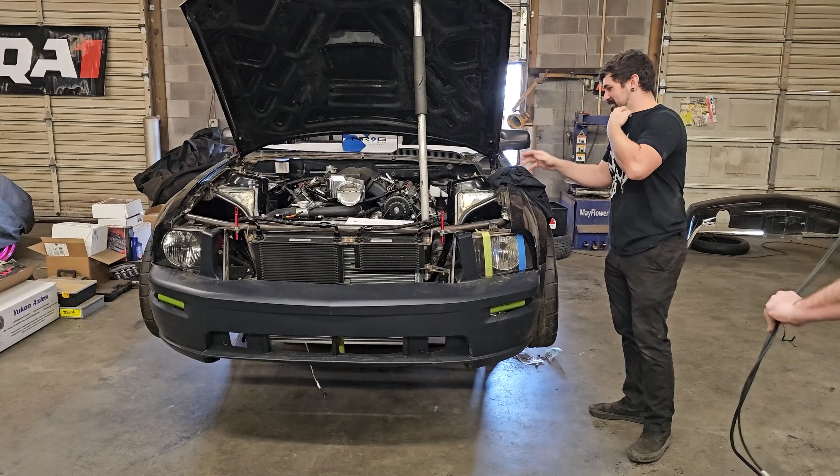Matt, I think this is the first time we'll be showing that you actually have a front end on your car. Look at that. Is that a V6 bumper? Look, I did it, I talked shit, Matt. It's not a V6 bumper. Show off the banners too? Dang, we're almost like real race car guys now.

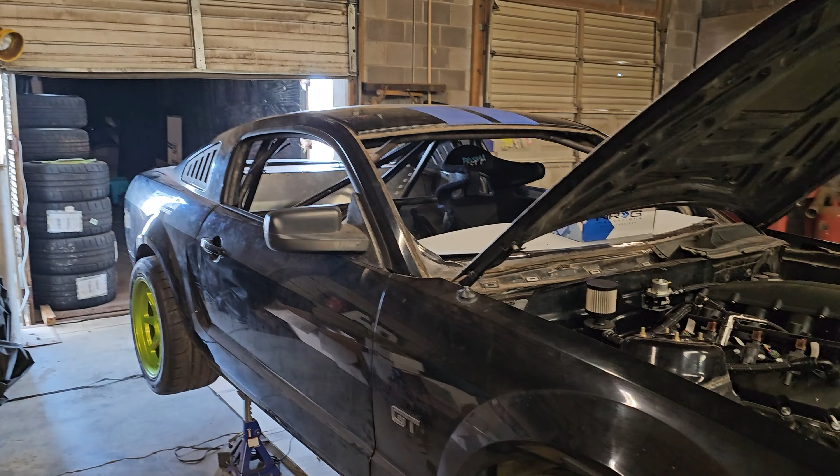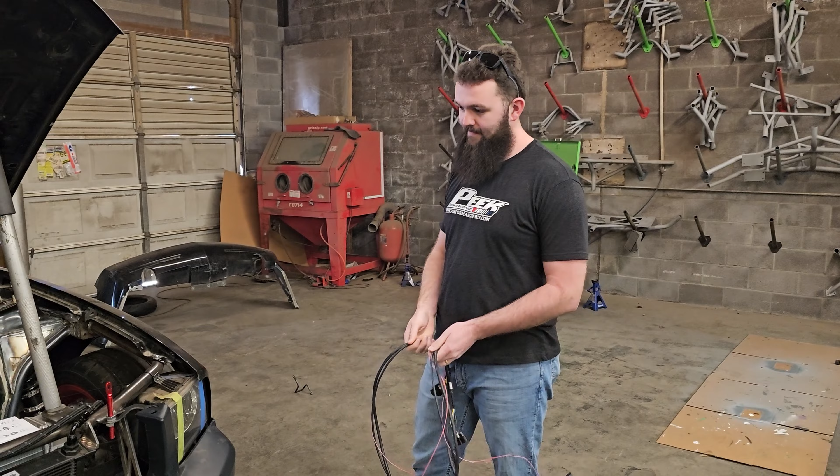For an intro, this is Ty. Ty is with Peek Performance, and he's a Holley dealer and an engine expert, and he's the guy who did all the dyno testing, or Spintron testing, at VTR to test valve trains up to 10,000 plus RPM. He's a nerd about cam profiles, valve springs, engine internals, all that kind of stuff, and he's here to help us with the Terminator wiring for the homologation between an LT throttle body and a Ford pedal.

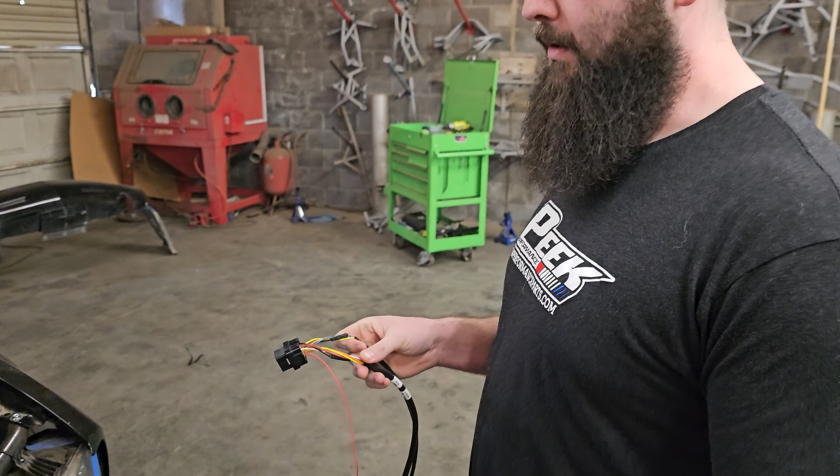So you were telling us something pretty neat about this, that even somebody like Matt could do it, that the wiring is pretty similar? Yeah, so Holley in almost all of their fuel injection harnesses follows a pretty similar color scheme. So no matter what you're working on, whether it's Ford, Dodge, Chevrolet, whatever harness application you have, the colors will generally be the same for a certain circuit. For example, on a main harness, a red and white wire is always going to be a switched 12 volt wire. A blue and white wire is always going to be a tach signal wire. A thick green wire is always going to be a fuel pump signal, and so on and so forth.

So whenever we're dealing with drive-by-wire, the main thing you need to program into the ECU is what throttle body you're using. Another generalization for the pedals - pretty well across the board, whether it's GM, Mopar, Ford, even a lot of Nissan pedals and imports - they use the same type of sensor, a dual inverted 5-volt signal. So it doesn't really matter what pedal you use, you just have to have the right connections and make sure it's pinned correctly.

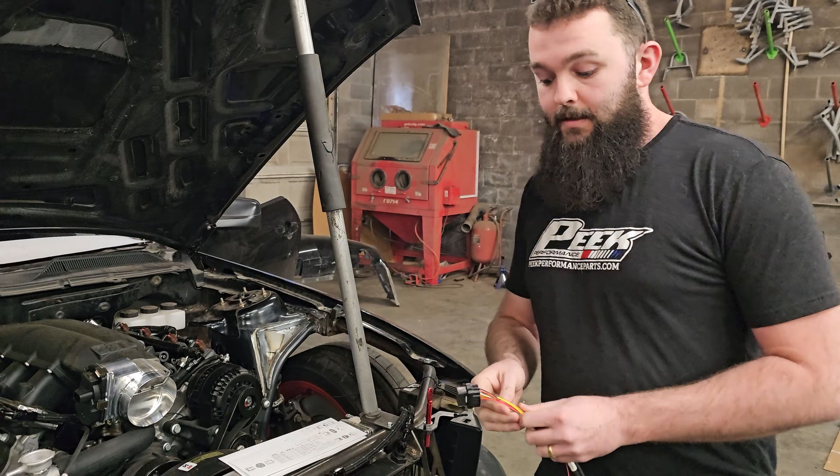So in this scenario, we're going to use the factory S197 drive-by-wire pedal. I think we're actually using an S550 drive-by-wire pedal. And this is actually an LS Nick Williams throttle body. That's some kind of gangster throttle body, isn't it? That thing's gnarly. 103, right? Yep, that's insane.

Holley has made it very nice that you don't have to actually split the drive-by-wire harnesses. Everything is separated, so you'll have a pedal harness and a throttle body harness that's already separate. All we're going to do is depin the pedal section away from this and put the Ford section on it. So we'll have a Ford pedal and a GM throttle body, and it should operate perfectly fine.

We were concerned about needing a specialty depinning tool, because I know a lot of stuff requires a fancy depinning tool and you can easily break the tabs. Do you need anything special for this?

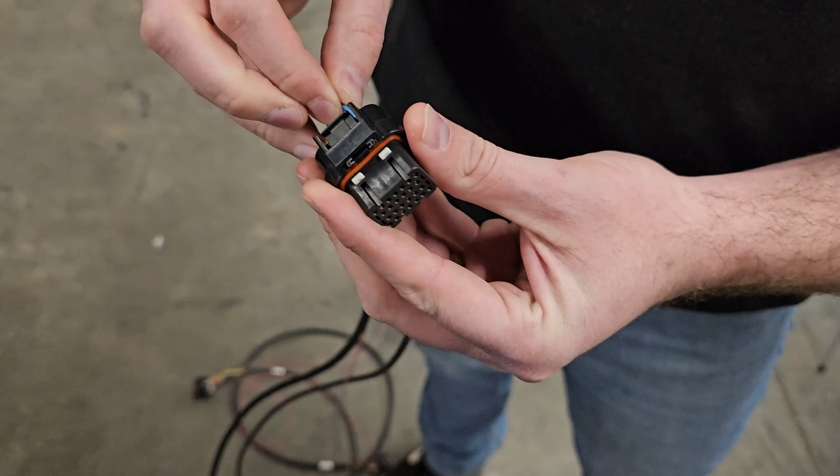No, so for these Tyco connectors, which are a pretty common connector for most aftermarket ECUs - Haltech, Holley EFI - you need no tools required. If you zoom in on this, you'll notice it's got white clips, little white sections here and on the bottom. All you're going to do is click - now it's unlocked, and you should be able to just pull it out. And you're ready to go. That's way easier, there's no special tools for this at all. And whenever you go to hook it or put the wires back in, all of the terminals are kind of up and seated.

And for example, this one right here, you want to make sure that it's seated all the way. Yeah, and once it is, it clips back in place. And it's not coming out anymore. Dude, that's way easier than I expected.

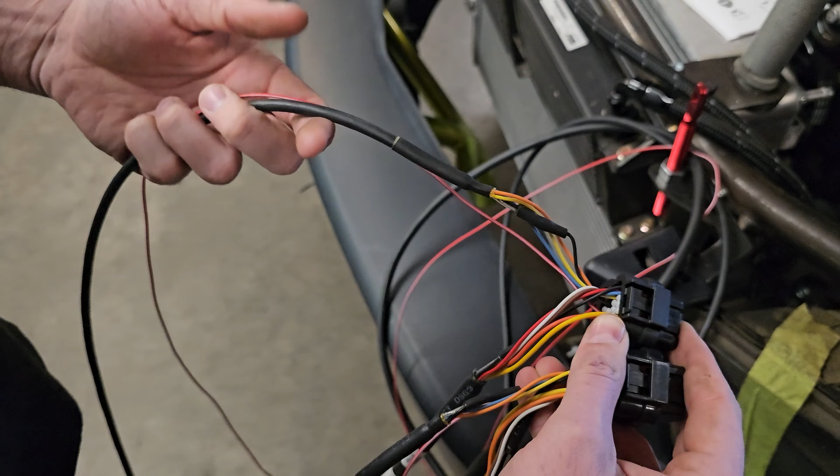I was scared, that's why we brought you here. So this is our pedal section. It's the smaller of the two wire bundles on both harnesses. You can see all the colors are the same. What's that, is that just soldered together ground wires?

So nothing in these harnesses are actually soldered. I don't particularly like solder in anything that's going to move. So the vehicle moves, it's going to have vibration, and solder will break. All of these connections in any of these Holley harnesses are ultrasonically welded, and then they put an adhesive-lined heat shrink over it. Got it. So I solder everything, but I haven't had a failure yet, so we'll see.

Just a personal preference. Matt likes twist and tape. Or house wire nuts. No.

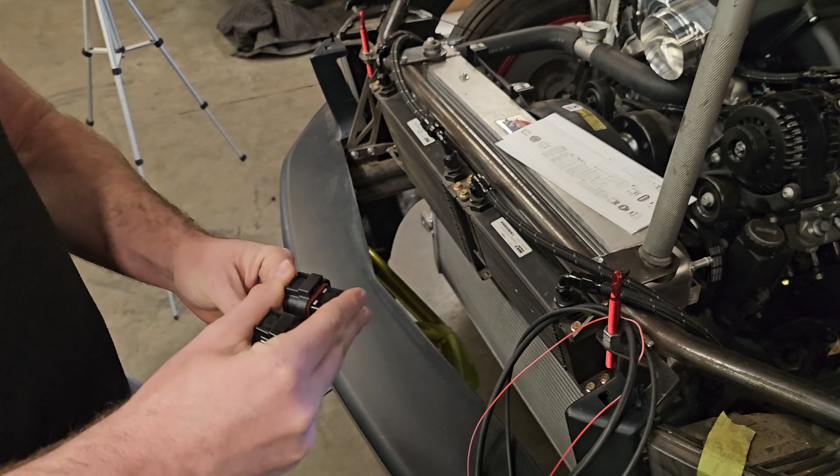We got lucky you are a Holley dealer and you had an extra pedal harness and everything, or a throttle body harness. What do people do if they're going to do something like this? Where do they get just the pedal harness? Can they get it? You can't get just the pedal section. You have to buy the whole drive-by-wire harness for whatever application you need.

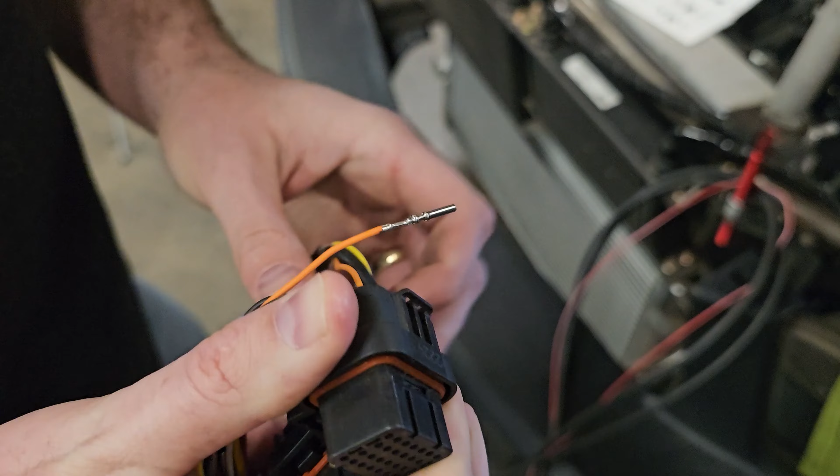Awesome, just like we did before, we're going to take both connectors and just pop that little white clip there on both of these, and I'm just going to do them one at a time. So we're going to start with the orange wire. So there should be only, you do it one wire at a time. These come with pre-terminated plugs in there, so you're only going to have one open slot, so you should have only one spot for that wire to go. Feel it click in place, make sure it's seated all the way, and then now we got this monstrosity, and we're just going to keep doing that.

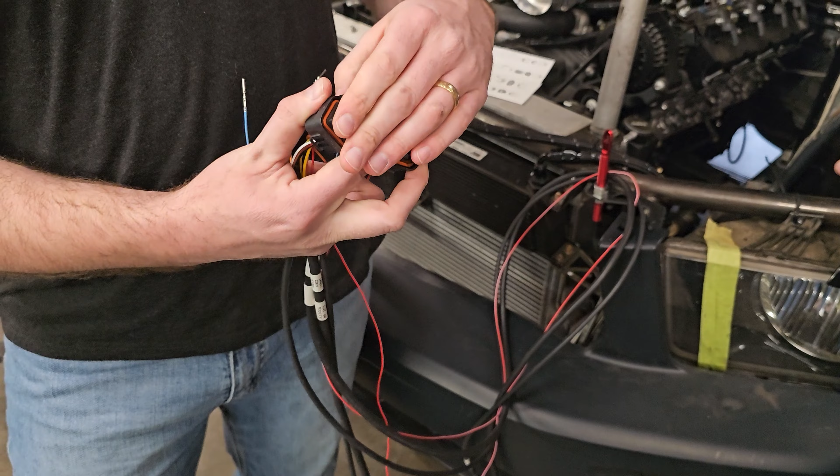I know the wire colors are the same, but are they in the same pin location? Yes, so the ECU side of everything is going to be completely the same no matter what application you're working with, whether it's a Gen 5, whether it's a Godzilla, whether it's a Coyote, everything is pinned at the ECU the exact same. That makes the ECUs universal, so you have one part number for an ECU, so it just works all the way across the board. Gotcha, and it's just the tune that changes, yep.

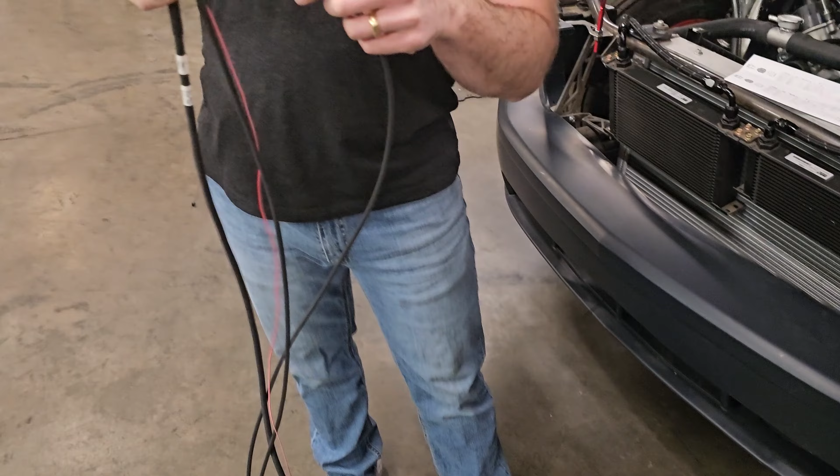Correct, just splice them all together and we'll put a pedal on the passenger side too. Yes. Dude, that's for when man, you're not going fast enough. Dude, that would be so much fun to do. Terrifying. I would love it.

Now is when you would need the schematics that I brought, just in case. We're not even going to let people know that you did it backwards. We're just going to let it look like it was the right way.

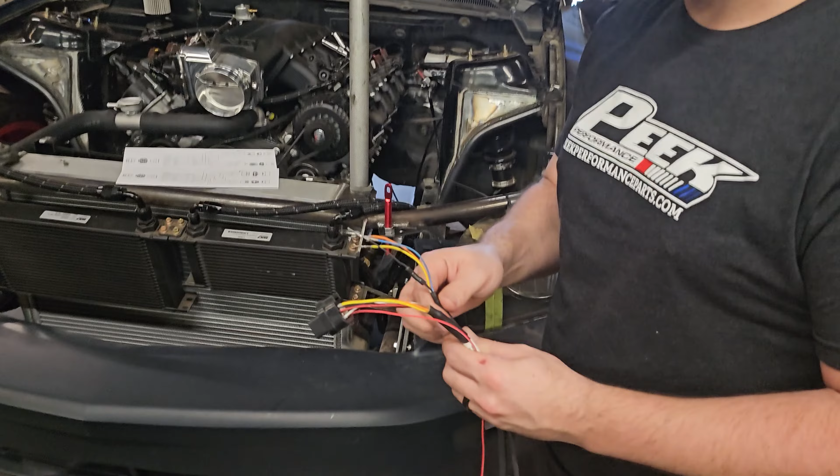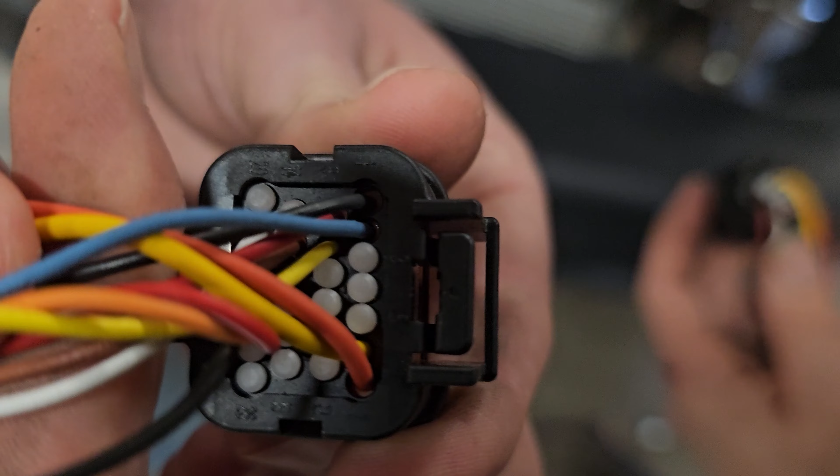Oh, of course. So this might be another good lesson to look at. If you look at the back of these Tyco connectors, there are numbers. They're labeled, so it's 1 through whatever the N number is, and that coordinates with your pin locations. And these diagrams are just on Holley. So pin B1, and B is the indicator for the actual connector itself on the ECU, so disregard that. But you're looking at, for pin 1, it's numbered here, so it'd be 1 through whatever number at the end there. So that's 1, and then the next open one is 2, and you read it just like a book. So that pin, just push it into that second open hole.

This second open hole? Yep, you'll kind of feel it pop in place. Okay, and then black, I guess it'd be the last open pin. You are correct. Now for sanity's sake, can we compare it to that one, make sure? Absolutely can, that's an excellent idea. Blue, yellow, black, orange. Blue, yellow, black, orange.

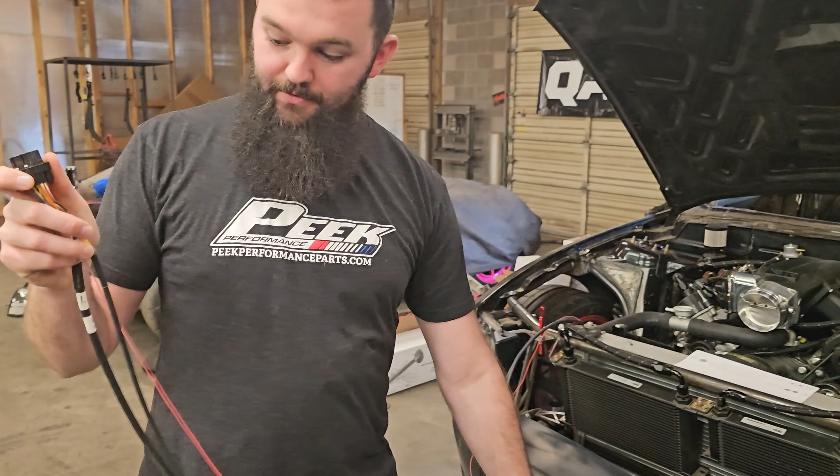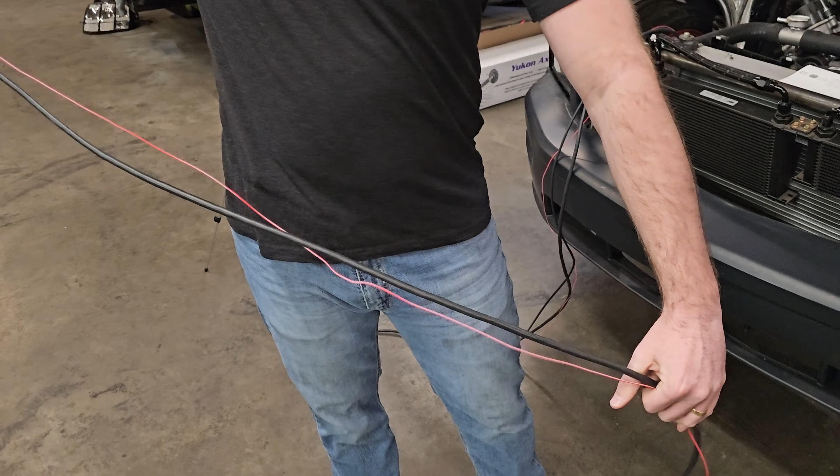So now we have this pedal connector, which is a Ford, with this throttle body connector, which is a GM. That's how all the drag racers do it, because the only way to make a Mustang go fast is to put an LS in it.

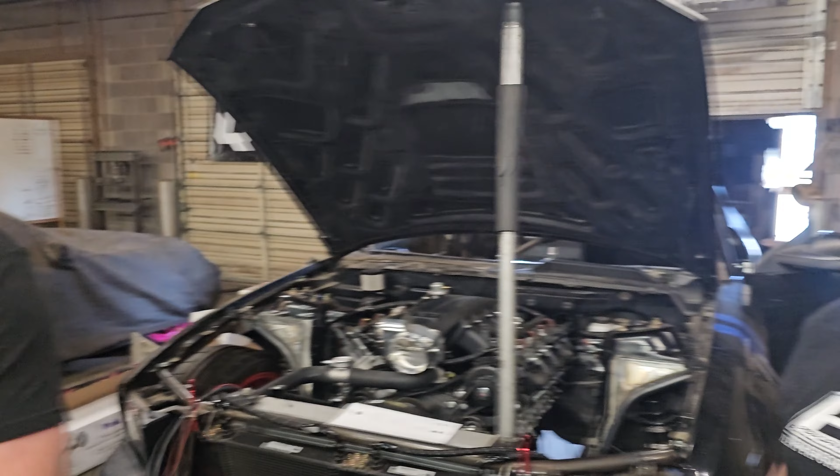I will say the only thing that Ford didn't do with this that Chevy does, and I don't know if LT is like that, but the heads aren't interchangeable, and there's different heads. I think there's different head studs per side too, like placement or whatever. It was just interesting to dig into it, especially in CAD where I have all the free time to poke at it and be like, oh, that's crazy.

So for the Cadillac, CTS-Vs are kind of notorious for having really bad differentials, and I don't have the money to put a winners in it. One of the blessings we have is that a Ford 8.8 is honestly one of the strongest stock differentials that exists, and we have 3 IRS diffs, including this one right there.

But we also have another diff that we haven't loaded yet, that's just kind of a spare IRS diff that we have. So realistically, we can have 3 different options, but I'll either run this one, which is loaded with a 513 gear set, or I run a 456 in the Mustang right now, and that's a 3rd gear, like all day car. It's a great setup, but the 513s was for like a 4th gear, like 107-ish wheel speed, which is really good for higher speed tracks.

And depending on the transmission that we put in the Cadillac, the 513 might actually be perfect for it. So overall, we're going to try it out, I think, or we'll load the other one up. But either way, the Cadillac is getting a Ford 8.8 put in it for the time being, and it should hold. I think it'll do good with the power level that it's at and everything.

So I'm going to design some bracketry to put the 8.8 in the Cadillac. I got the Cadillac in CAD already. I had Justin scan it, so I have the scan of this differential, and I'm just going to do some CAD wizardry and make a differential mount. So I'll show briefly what I've done, and then let's see if we can get it made too.

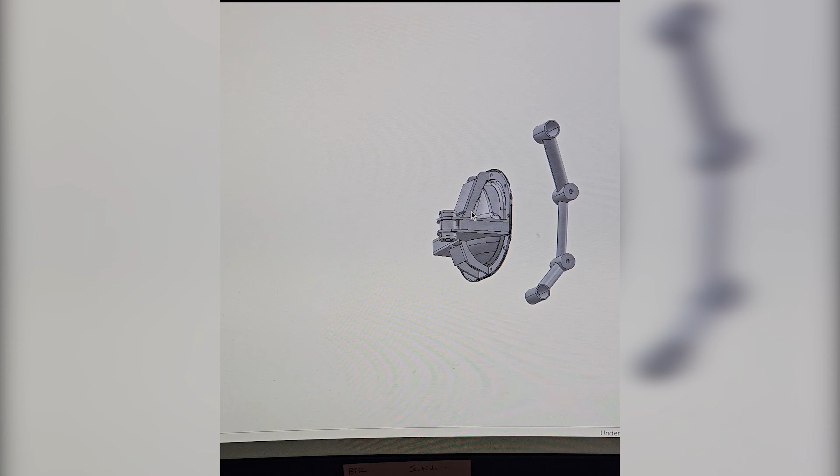So there it is. The funny thing is we actually switched back to a regular 8.8 diff cover to use this because the clearance is so close. Other companies have made their own diff cover, which are really expensive, but we just made some tube stuff. This is all stuff that we have here, and this is some plate 1/4 inch stuff with a tube in it and some bushings. I think it should work out pretty good.

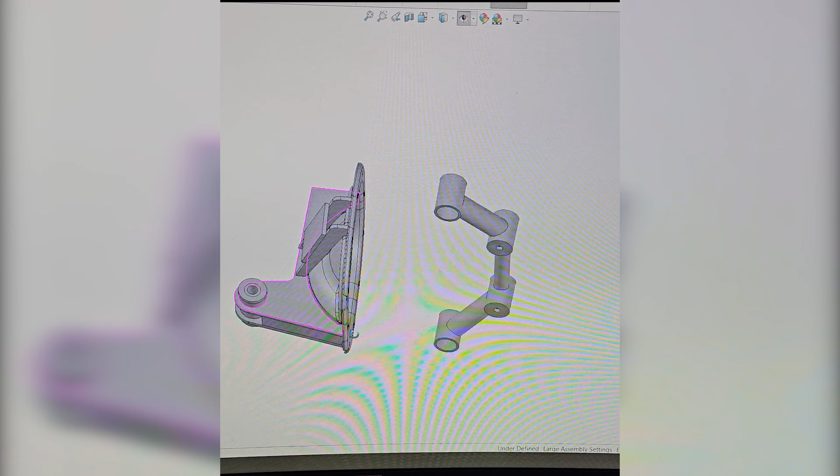We still have pinion angle adjustment with this because the diff bolts up to here, and we can just space it with washers and get our pinion angle correct. Let's go see if we can slam this thing together and get the diff in the car.

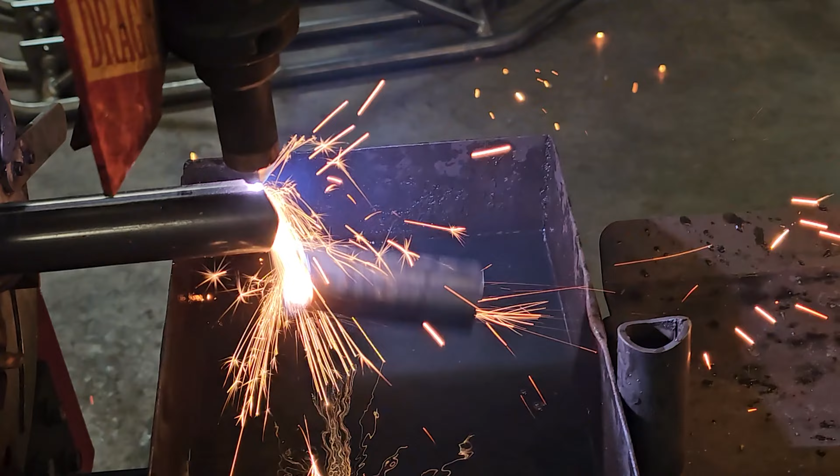That was fast. Well, that was even faster.

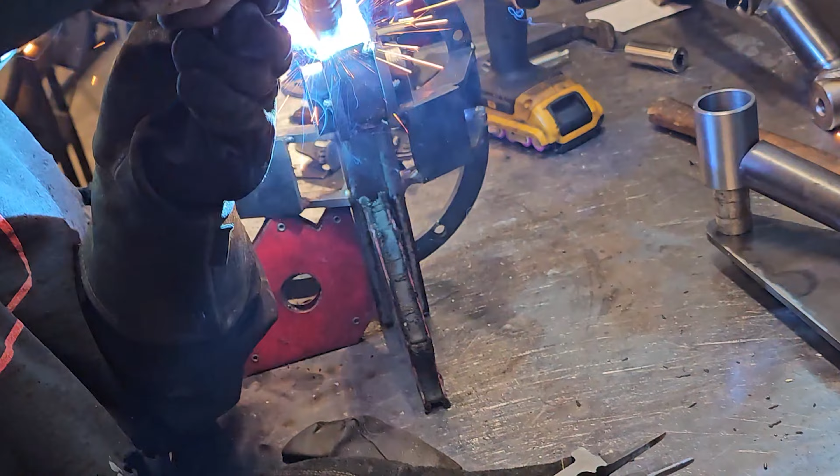Make it do the thing, Scott. Okay, make it do the thing? This thing? The thing. Let's look down his throat. Make it say ah.